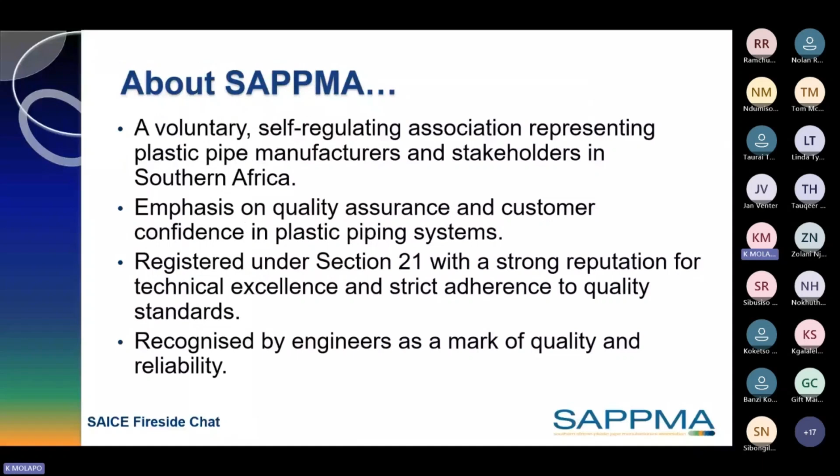You've actually done a great job introducing SAPPMA, and you were very correct in everything you said. We have members that we represent who are manufacturers of plastic pipes, and we also represent all other stakeholders in that plastic pipe value chain, like suppliers of raw materials and other converters.

If you were to go to our website, www.sappma.co.za, we have a technical manual, now on its 5th edition. From that manual you can download much more than what I'm going to show you today. Because we have limited time, we'll just focus on a few things, just to excite you and make you aware of certain differences between traditional materials and plastic pipes or thermoplastics.

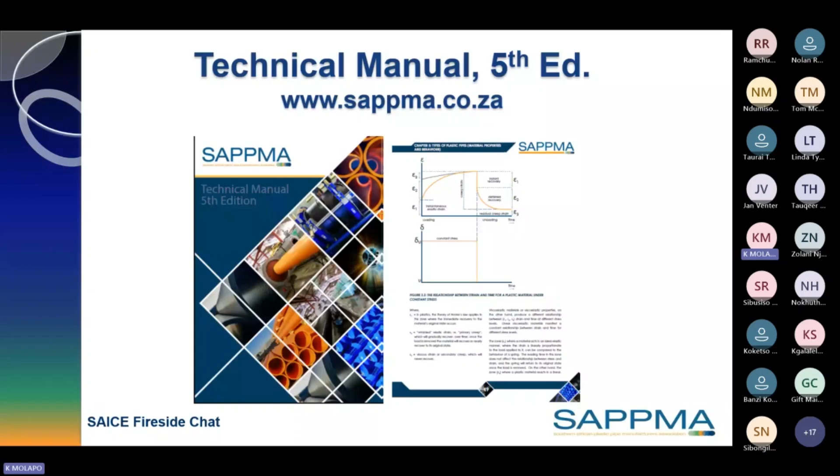So why are we here today? We currently have a serious problem—actually, I would say it's a nationwide problem. I'm sure you are well aware that South Africa is a water scarce country.

Gauteng or Johannesburg, for instance, is sitting on a watershed, and we can't even store water here. The nearest place we can store water is the Vaal. And for us to get that water, it has to be pumped all the way, almost 100 kilometers, and pumped in 2 stages until it gets to reservoirs.

Then it gets distributed to various municipalities. Apparently, in Johannesburg, they lose about 50% of the water that they receive from Rand Water. This is not only Johannesburg. Other municipalities are a little bit lower. But you can imagine if you are collecting that water, or buying that water from Rand Water supplying you at a certain rate, and then you have to sell it.

The profit that you are going to make now, you still have to pay for it. Let's say you bought 100 liters of water, you have to pay for 100 liters of water, even though you are now left with 50 liters to sell. That cannot be sustainable. So we as SAPPMA, we have decided to come forward and offer our help.

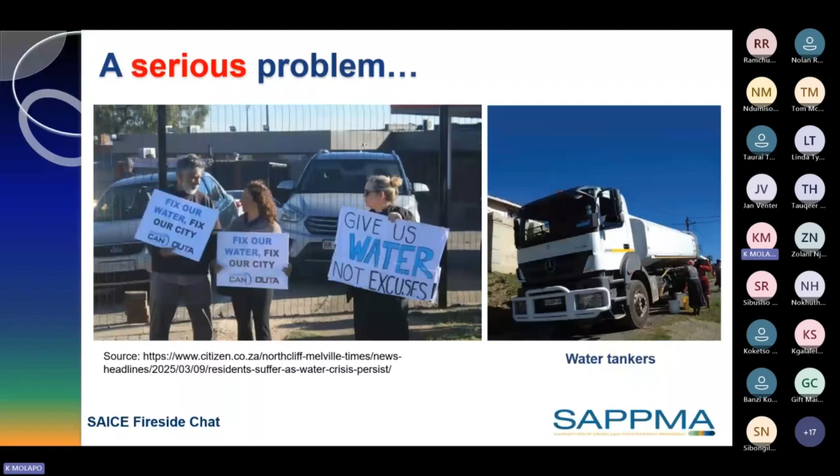So we asked the question, why are we here today? We are here because of the water crisis in Gauteng. Over and above the other things I've told you, up to 50% of water is lost. There's also aging and failing infrastructure.

Our only hope is the Lesotho Highlands Water Project Phase 2, which has also been delayed. Other people are speculating that it will be completed around 2030. Others are saying beyond that. So SAPPMA is here to offer help through training and technical support.

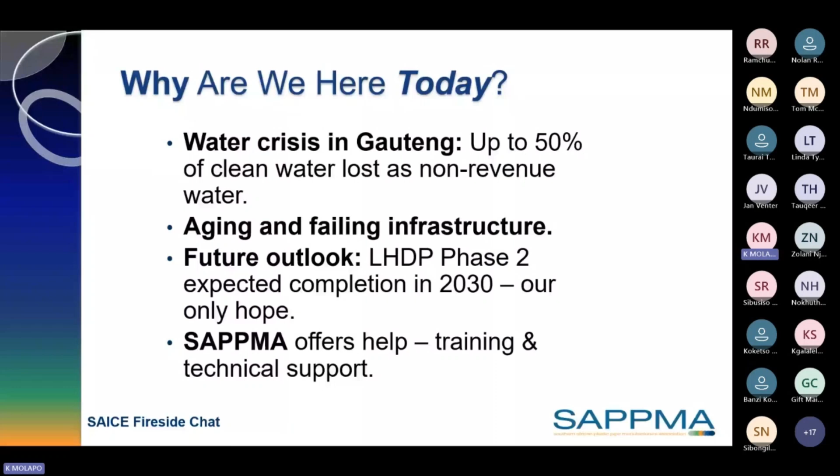So let's go into plastic pipes. There are two main types of plastics: thermoplastics and thermosets. Thermoplastics are plastics that change, they become soft with increasing temperature. As the temperature reduces, they become harder.

So you can either heat them and make them soft and mold them, and you can reverse that molding and reshape it into a different thing. But you cannot do the same with thermosetting plastics. Once you expose them to heat, they harden.

And the reason they harden is because they have cross-linked chains, which also have a 3D molecular structure that disintegrates under heat. So once you do that, the whole thing becomes hard. Whereas with the thermoplastics, they are uncross-linked chains, and we can heat them up to soften them, and also cool them down to make them hard.

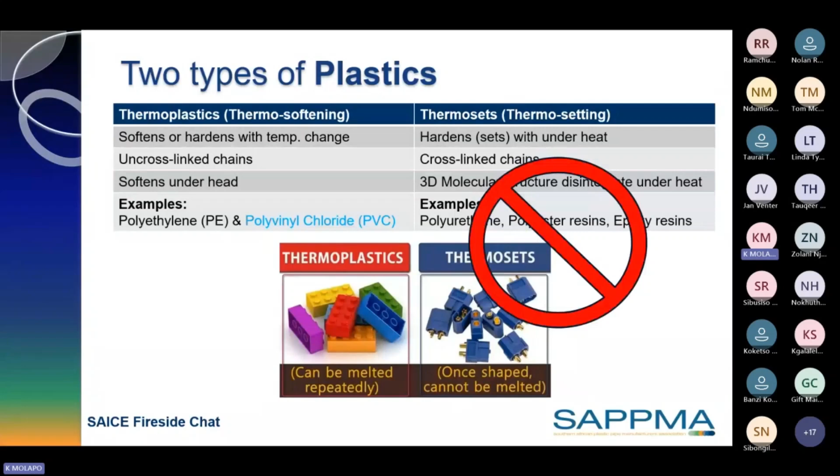Examples of these thermoplastics are polyethylene and PVC. These are the two main materials that we are going to be talking to you about. And we have to stress the point that we want to distinguish them from the normal thermoplastics, in that this type of plastics are called noble plastics.

So whenever I'm using the word noble plastics, you need to know that I'm referring to the thermoplastics that are polyethylene and polyvinyl chloride, and there's also other ones like polypropylene. I want to make this distinction to separate them from commodity plastics that are used for packaging, which are sometimes, or most of the time, responsible for pollution and the microplastics issue that we are always hearing about in the news and on the internet.

So why are they noble plastics? By definition, they are high performance. They're durable, chemically stable polymers. They are also very superior to commodity plastics in that they have long-term reliability and resistance. In fact, they're designed for a lifespan of longer than 50 years.

So they also play a very important role in infrastructure development because of their longevity, efficiency, and sustainability. So you can recycle 100% of these plastics.

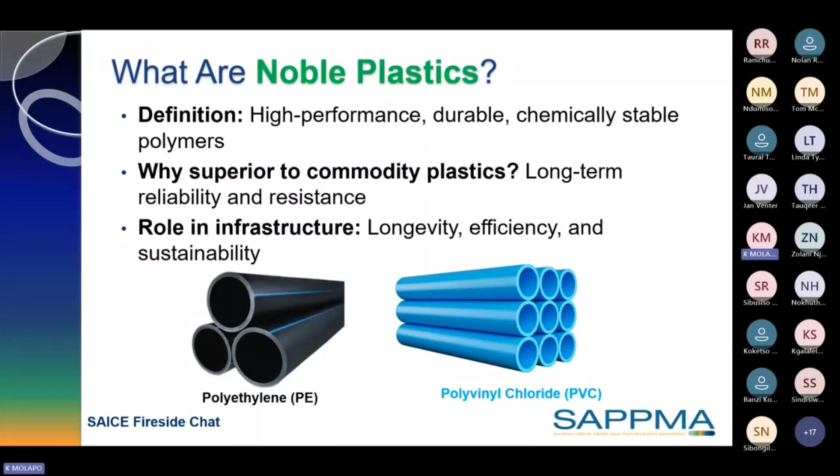So why are we considering the two of them, HDPE and PVC? Both of these materials, although different, are durable and have longevity, meaning lifespans of 50 to about 100 years, so you can use them very well over a long lifespan for infrastructure development. They are also resistant to chemicals and corrosion, which means they are ideal for clean water, sewage and industrial applications, including acid mine drainage.

They also have very smooth surfaces, making them have good hydraulic efficiency. Their strength to weight ratio is high, they are light but have relatively high mechanical strength. In terms of sustainability, they are 100% recyclable, and they play a very important role in the circular economy.

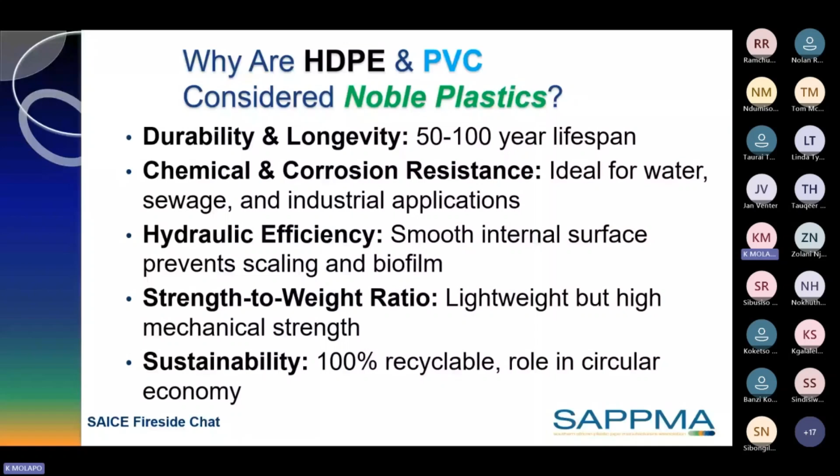So how do they behave? Noble plastics like PE, polyethylene, and PVC are like you and me, in that they have a unique footprint. They also have a working life. We know that we have a certain life expectancy from when we are born. Same way, they also have the same thing. As they grow old, they regress, meaning the strength that you test or get from the lab today, as that pipe is in use, will be slightly lower after a long time.

That's where the creep rupture regression curve comes from. The CRRC that you're seeing there is a creep rupture regression curve, which shows that the strength declines with age.

So they are also temperature sensitive, like a baby, when they are cold, they will sneeze, or even a middle-aged person or an old person. When we are very hot, we want to take off our clothes. Same thing happens, but in a slightly different way, in that when temperature rises, they become soft, and even the strength reduces. But when they become cold, then everything reverses.

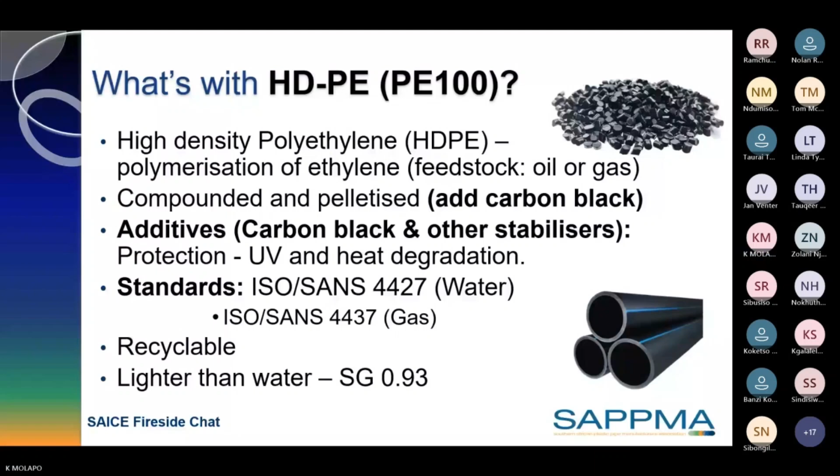PVC - not all pipes or plastics are PVC. So we sometimes see in specifications that they have asked for a perforated PVC. I think they used to make it a long time ago, but now if you specify perforated PVC that is black, usually the person specifying actually meant corrugated HDPE. So because maybe they are not aware of what the word PVC means, they would take anything that is plastic to mean PVC. Maybe the confusion comes from the P in PVC.

PVC stands for polyvinyl chloride, which is also derived from oil, but here you also have salt. So you have salt water that is taken through a reactor or process that will produce chlorine. Then that chlorine is added to ethylene, producing vinyl chloride monomer. So in the same way as the other one was producing a monomer, you have to polymerize it. By polymerizing it - the word poly meaning many - you are now forming it into many chains. That's how it becomes polyvinyl chloride.

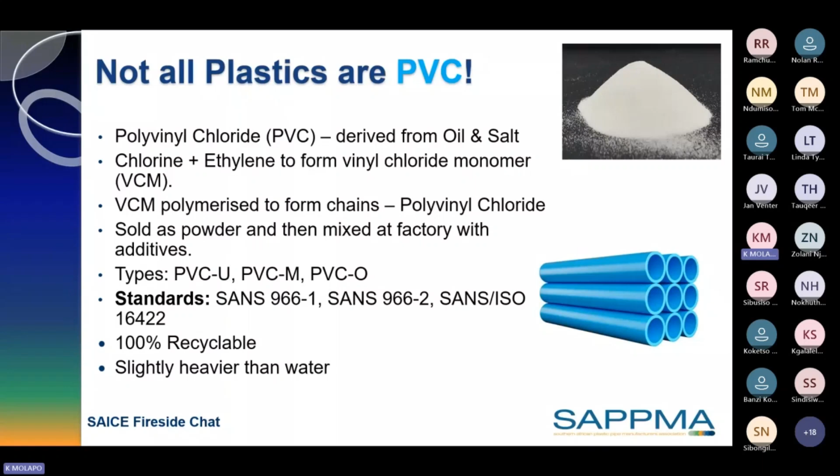So standards that are applicable for PVC, even though I have not listed all of them: for a pressure pipe, you have for PVCU 966 part 1, PVCM is 966 part 2, and then you also have the standard for PVCO. All of them are 100% recyclable, and they are also slightly heavier than water, with very good properties for conveying water.

So we've already said that these materials have a unique fingerprint like human beings. Each one has a rupture regression curve with a particular formula involving logarithms - a log scale in the vertical direction and another log scale in the horizontal direction, showing time. I will show the slides for how those regression curves look next. The minimum required strength, the MRS, is determined at 438,000 hours, which is the equivalent of 50 years.

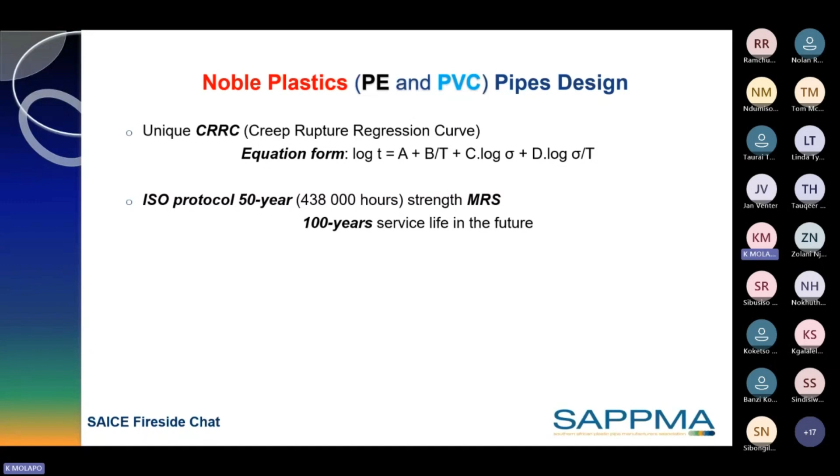In the future, there are people doing studies - in fact maybe there are some materials already which can get to 100 years. You will see how those times show on the regression curve when I show it. So the minimum required strength is at 50 years, and remember the materials are temperature sensitive, so you have to specify the temperature, like normal ambient temperature of 23 degrees.

So how do you classify these materials? You have the allowable stress, which is the MRS divided by the design coefficient. The design coefficient is more like a safety factor - in other disciplines, when designing concrete and other things, you also have safety factors. The design coefficient C depends on the polymer attributes, so different materials or plastic pipes will have different C values, ranging from about 1.4 to about 2.5.

So the lower the number you are dividing the MRS by, the higher allowable design stress you get. These materials are stronger, tougher, and more ductile. But the brittle materials will have a higher C value, meaning the allowable design stress will be lower for more brittle materials.

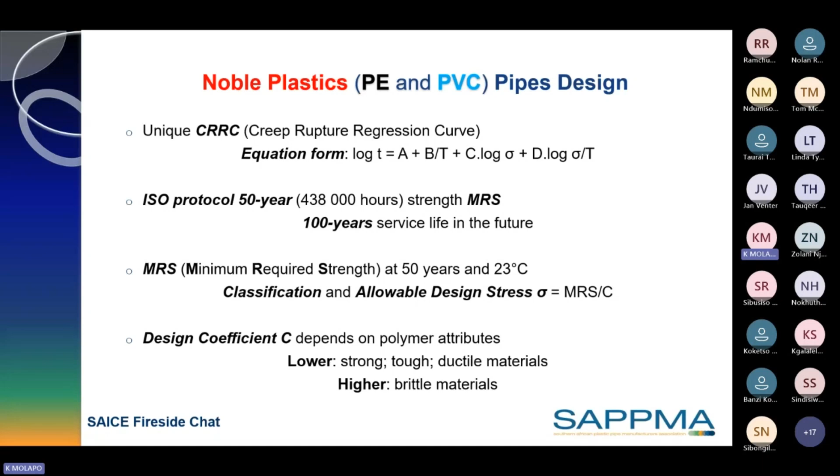So here is an example of a regression curve shown for PE 100. I will show you where the 100 comes from in the next slide. You will see different lines starting from the top going down. If you look at the bottom left corner of your screen, each line corresponds to a different temperature, so as the temperature increases from 20 to 40, 60, and 80, your allowable hoop stress reduces.

At the same time, you will see that the lower you go, where the strength is lower, you also get a more brittle mode, which goes hand in hand with what we just discussed about a higher C value giving you a lower stress.

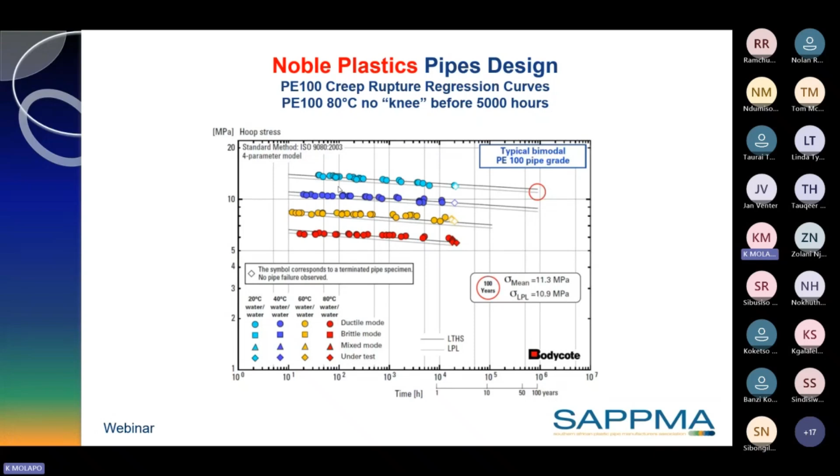So here you have different PVCs. The O has a higher strength, so you have O500. You also have PVCU and M, modified and unplasticized. And then at the bottom you have HDPE.

So to get that 100 of HDPE, which is PE 100, you look at the green vertical line, which is 50 years on the log scale, and the red one is 100 years. You go to where your PE line crosses the green line, and if you draw an arrow, the bottom arrow face pointing to the left gives you a value of 10.

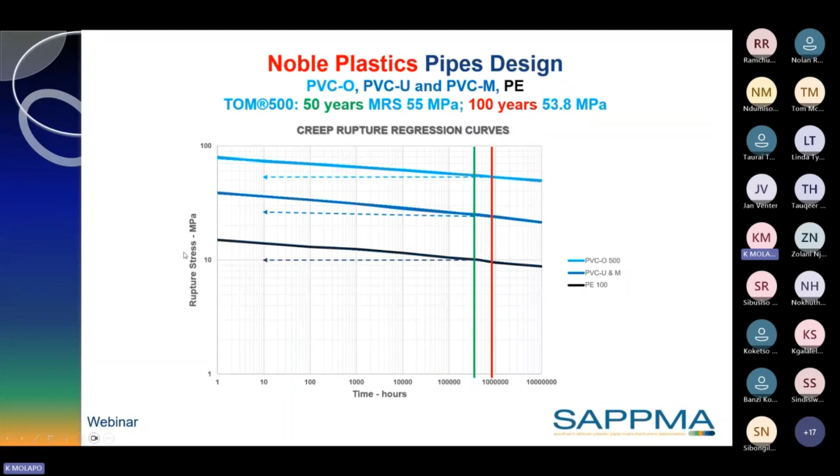So to classify these pipes, you take that value, which is the rupture stress or the MRS, the minimum required strength, and multiply it by 10. I will show in the next slide what I actually mean.

So here is the MRS as you are reading it from the previous graph, which is the value of 10, and then you multiply it by 10 to get 100. So for PE 100, this is how you get to that classification. In the past, we had PE 80 and PE 63, so the MRS for those two were 6.3 and 8 MPa.

So we've already said something about how you obtain your allowable design stress, which will be the MRS divided by the design coefficient. This is more like reducing the strength, so that when you do the design, you are working on a smaller strength.

So for gravity pipes, or even any pipes, you have a formula to work out the ring stiffness, where SR gives you the ring stiffness, E is the elastic modulus, I is the second moment of area, other people call it moment of inertia, and D is the diameter.

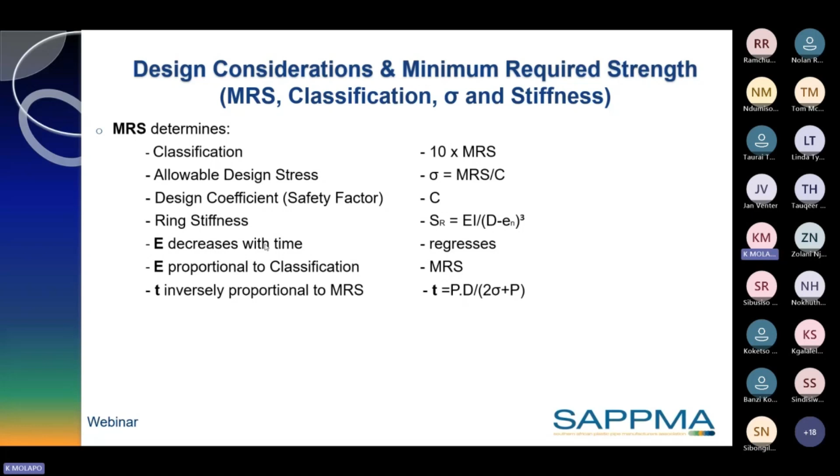The elastic modulus decreases with time. As we said, materials are the same as us human beings, in that with time they regress. Also E is proportional to the classification, so as the MRS decreases, E will also decrease. So T, which is your pipe thickness, is inversely proportional to MRS.

You calculate it using what they call a Barlow equation, where you take a free body of a pipe, assume the wall is a thin section, resolve your forces, and you should be able to work out T, or the thickness, from the resulting equation.

So for PVCO, you have 5 material specifications ranging from 315 to 500. The 500, if you divide it by 10, gives you an MRS of 50. The other one, the lowest, will be 31.5, which as you can see is much higher than what we were seeing for HDPE.

We also have 3 design coefficients corresponding to various material classes, ranging from 1.4, 1.5, and 2. So in working out your allowable design stress for PVCO, you will use the design coefficient C to divide the MRS by.

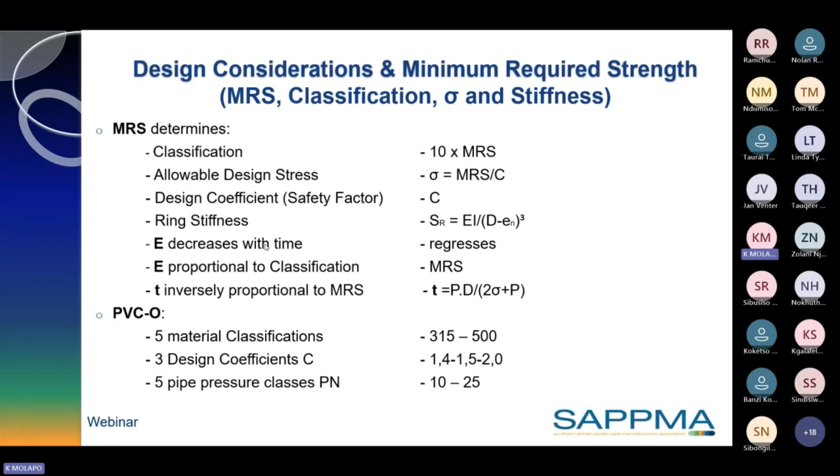So example of polymer classification for both PE100, where the MRS is 10, and for PVCU, where the MRS is 25. In fact, the correct classification of that PVCU should be PVCU 250. But for PVCO, you have 5 material classifications, 3 Cs, and 5 nominal pressures. So you have to be cognizant of the fact that for PVCO, you have those different values of C.

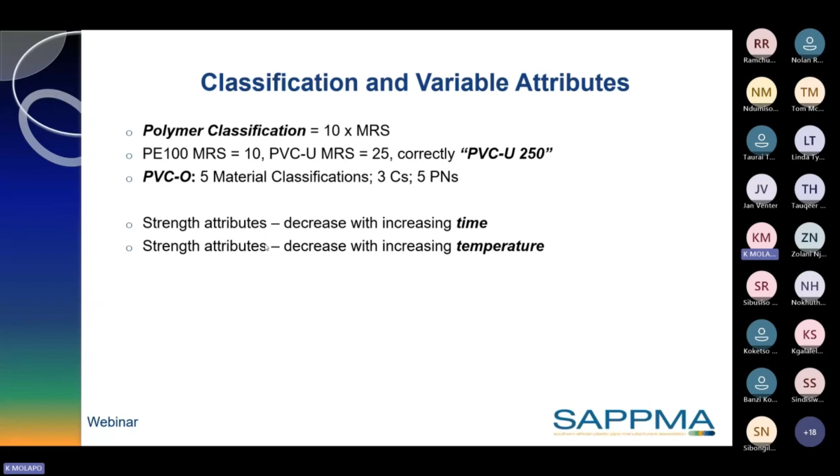So the strength attributes, as we have already shown, decrease with increase in time, or as time progresses, and they also decrease with temperature. So the strength attributes increase with decreased time and decreased temperature. Meaning if you were to reverse the decrease in temperature, the results, even though the time we can't, cooling, let me leave out the time, but cooling your plastic will reverse the attribute.

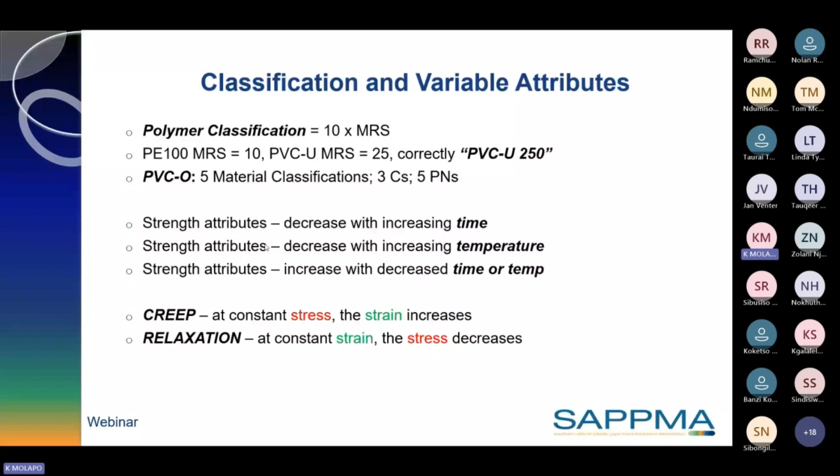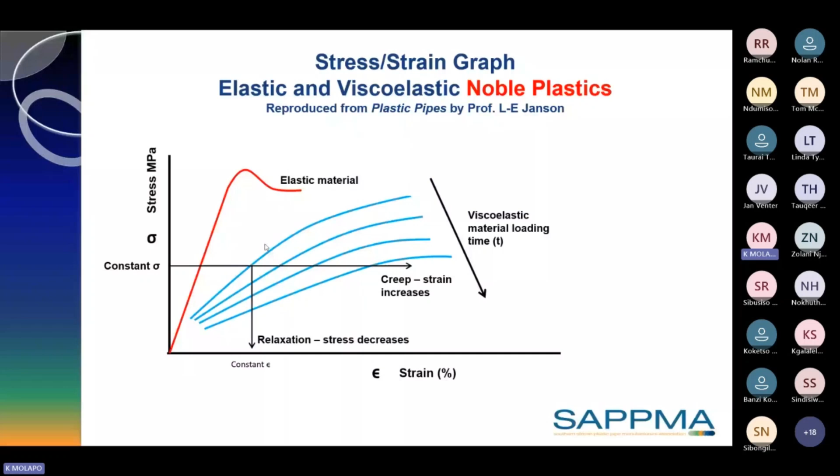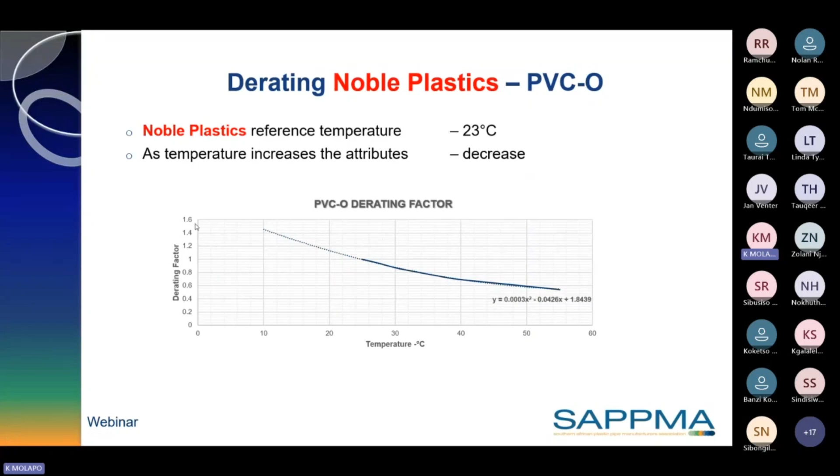So as the temperature goes below, but this was extrapolated, you can see the graph shows the strength or factor going up, meaning the strength will go up. But as you increase the temperature above 23 degrees Celsius, your strength drops, or the derating factor goes down. So this is what you will multiply the strength by.

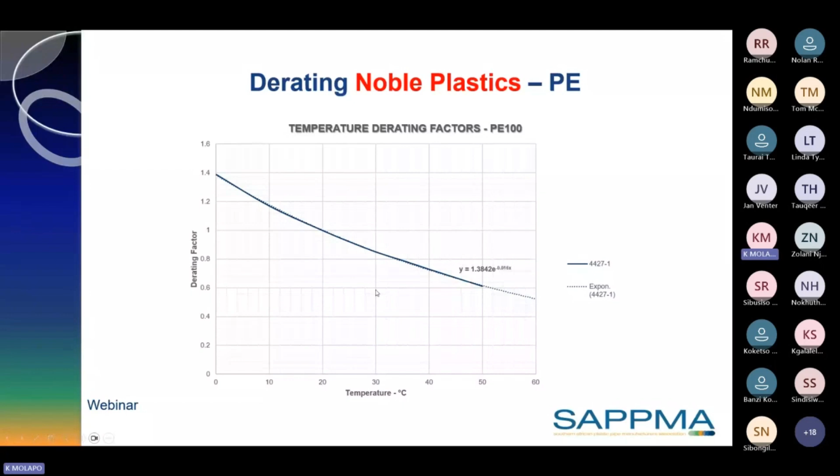So your elastic modulus also for PE, you can imagine if the strength is dropping as the temperature increases, you can also expect the elastic modulus to drop. So if, for instance, you were to install this pipe in Kathu or Sishen, or maybe up north in Namibia, where the temperatures sometimes go above 40 or around 40 degrees, and you want to work out the elongation, at least you know that you have to take into account the factor that your elastic modulus drops as the temperature increases.

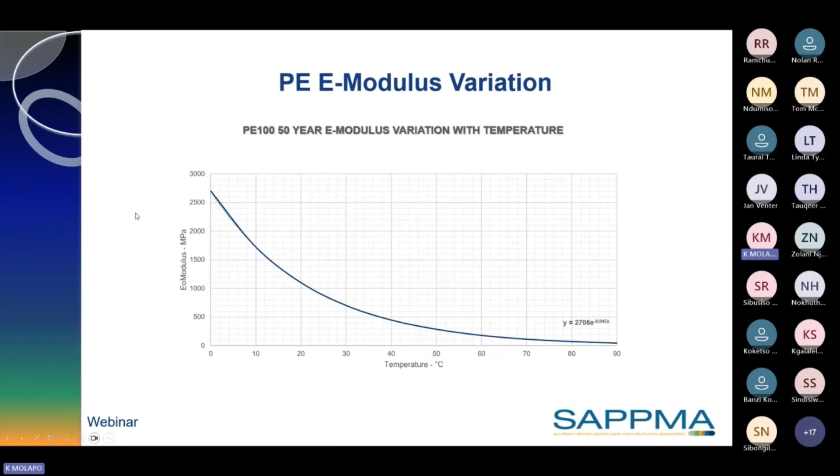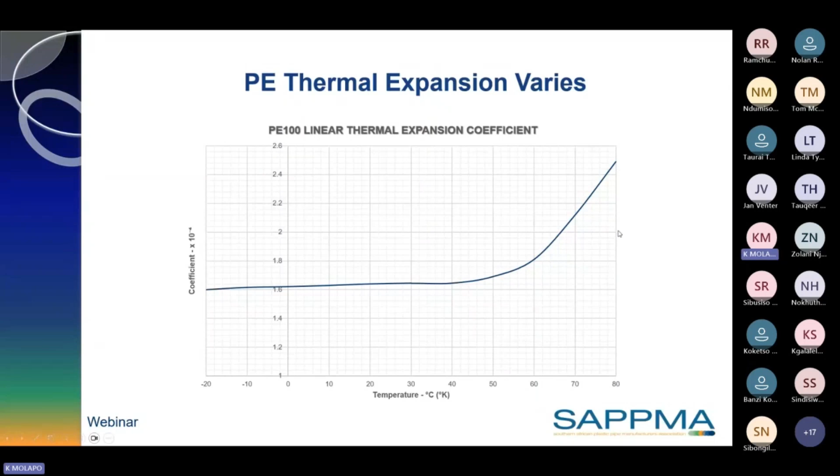So it goes up. Usually your PVC and HDPE or PE100, it's always advisable to use them below 60 degrees Celsius. Anything above this, they are special, or maybe you need to get advice, or there are special pipes like polypropylene, which can actually take boiling water. And there are also variations of polyethylene and variations of PVC that have special additives in them that enable them to go above 60 degrees.

So the other pipes that are there in the market, you have structured wall pipes. These are large diameter pipes that you normally use for no pressure, like where there is no pressure, that is gravity, and even for sewer outfalls.

But the challenge with these pipes, because they are flexible and very large in size, is you have to be sure that compaction around the pipes, even the bedding, is done properly. The same applies to all other pipes, because not compacting properly can cause problems with leakages in the future, or the material on the pipe sagging and then compressing the pipe. You can imagine when a pipe deflects where it's supposed to be jointed, the joint can open up, and then you have issues with leakages. So it's very important to make sure compaction is done properly.

The other material we have is multi-layer PVC for sewer, also called foam core, which is an innovative material that uses recycled material within the wall of the PVC pipe. Then you have corrugated HDPE, some of which have two layers: a smooth layer on the inside, and corrugation on the outside. These pipes are mostly used for ducting. You also get corrugated HDPE for subsoil drainage, where the same corrugated HDPE pipe comes with a sock on top of it.

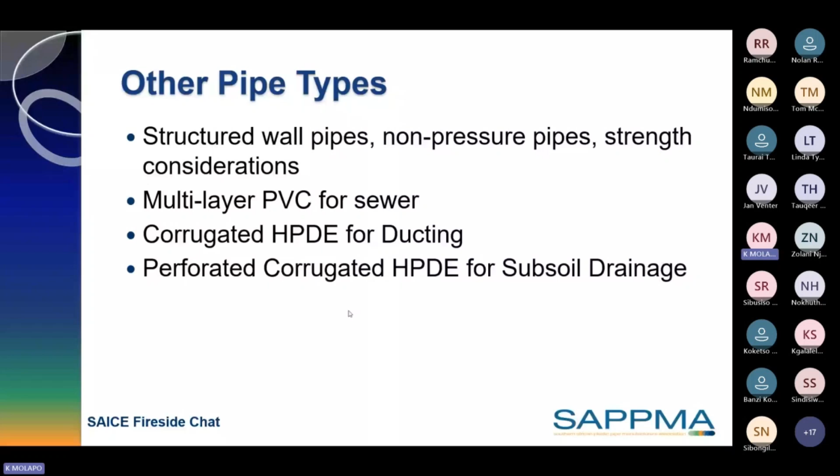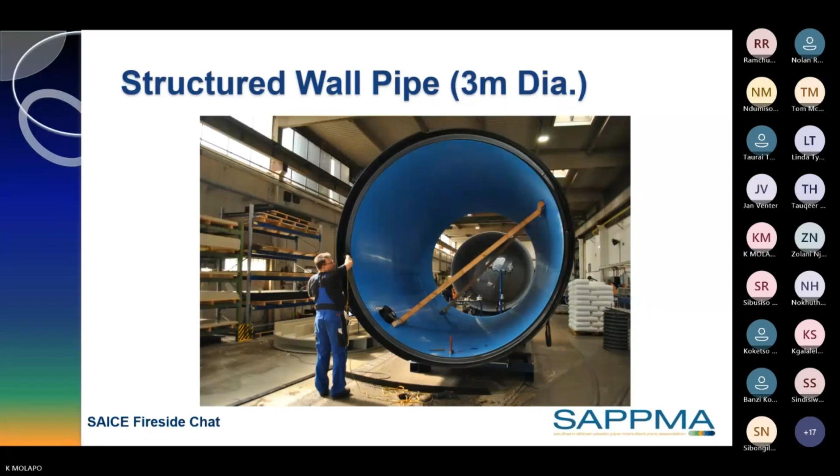But I see them replacing concrete pipes for sewer in the not too distant future. These pipes are also good for areas underlain by dolomite, because you can weld them. So instead of just having a concrete pipe with a seal, with these you can actually weld each pipe together. The other nice thing about them compared to concrete is that they are very light in weight, so they don't require heavy equipment to move around.

For the structured wall pipe, the gravity market is dominated by reinforced concrete pipes. So whenever you talk about structured wall pipes to engineers, they will ask how stable the pipe is and whether it can take loads. You have to be aware that whenever you use a structured wall pipe, you have to build the structure on site. That is, you have a pipe, and when you get to site, you need to make sure the soil surrounding that pipe is properly compacted, and you build it properly to make sure the pipe is supported properly, the same way it's recommended in SANS 1200L, LB or LD for compacting your backfill. That's exactly how you're supposed to do it for SWP.

For those people who are pro reinforced concrete, they like to say that what they are giving you is a conduit and a structure at the same time. Sometimes this justifies that there is no need for proper compaction around the pipe, because the pipe can already take the load on its own, which I really believe is not good reasoning to use, because you get roads that are uneven, because when people are backfilling the soil is not compacted properly, as they believe the pipe can already take the load, so they don't need to build that structure on site. I believe you still have to build the structure, even though the reinforced concrete pipe is strong enough. So yeah, that's my opinion. I suppose next time when we have another debate, we can discuss it further.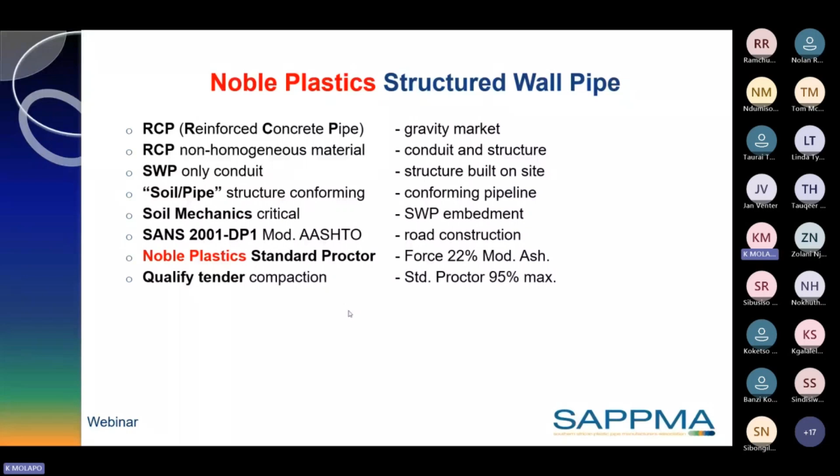So for noble plastics, the standard Proctor force that you use has to be 22% of mod AASHTO. For tenders, usually you have to specify a 95% maximum. Casagrande SC classification specifies 90% mod AASHTO, which is equivalent to a 95 standard.

The pipe stiffness, not ring stiffness, is a measured value, which is also important when you are designing this structured wall pipe. You have to take into account the pipe stiffness as it's going to actually work with the soil structure that you are building on site.

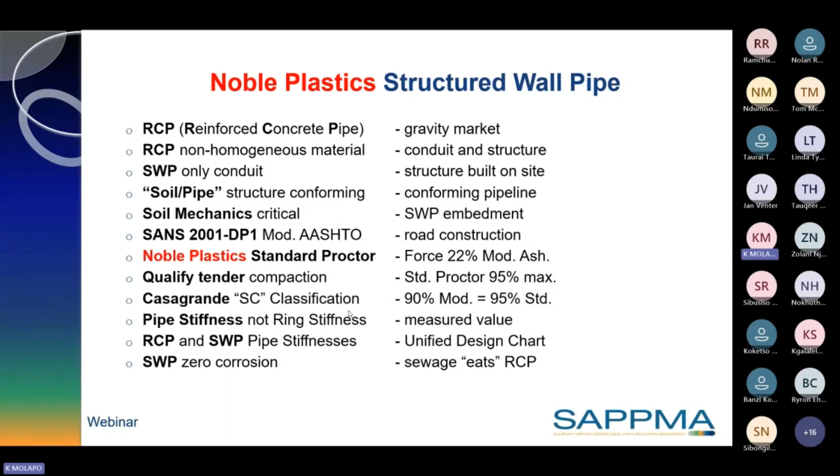Same design charts that you are using for reinforced concrete pipe you use for structured wall pipes, but with the advantage that your flow characteristics are a lot better. So the coefficient of friction is lower, and as other plastic materials, the corrosion is zero. So sewage, actually, eats reinforced concrete pipes, so much that you actually have to line them with the same plastic. So I don't know why we don't build them with plastic from the beginning.

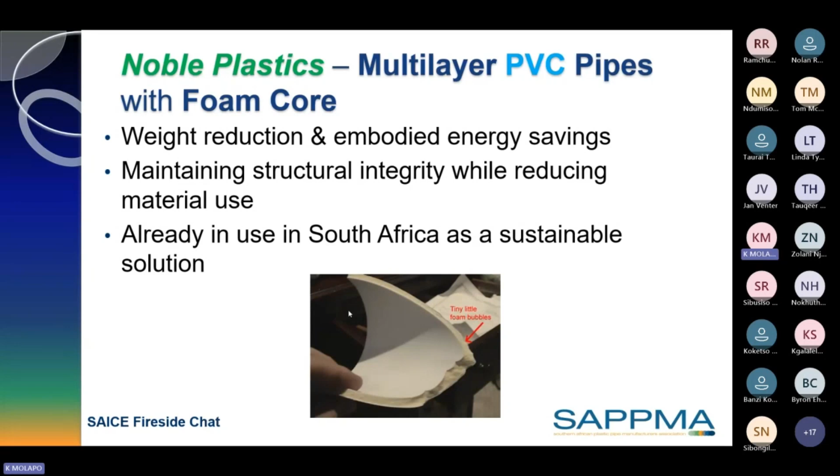So the foam core plastic as one of the innovative materials. I'm just showing that's already being used in South Africa as a sustainable solution for sewage, and it's lightweight. The embodied energy is low, and it's very stiff. You do this while maintaining the structural integrity and reducing material usage.

The other benefits of plastic pipes, also with respect to sustainability, they play an important role, as we have mentioned in the beginning, in the circular economy. They are 100% recyclable, and their hydraulic efficiency is good. And in the future, they can also be used for hydrogen conveyance, which I think will be a big thing. Even for new green energy projects, we can also use these pipes.

We need also to address the misconception about microplastics in pipes. So the reason I was making a distinction of noble plastics in the beginning was to distinguish them completely from the commodity materials or plastics that are used, even though these commodity plastics can be called thermoplastics, but they are not performing at the level of noble plastics.

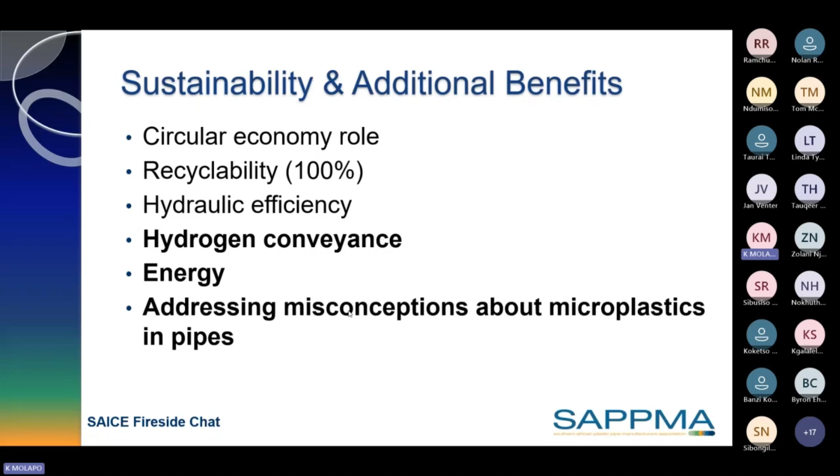So in conclusion, Noble Plastics, PE and PVC are like me and you. They have a unique fingerprint, which means each one of them has its own regression curve. They have a working life. They grow old with time, as you can see on the pictures there.

I wonder whether the term regress is the right one. Maybe we should just say they grow old, because it's as if things go backwards. Temperature sensitive between hot and cold, and they are suited for a particular job. Also, unlike other materials, they have variable attributes varying with time and temperature, and they have superior attributes short term, and they have superior niche uses like slurry, and have less environmental impact, and they are recyclable.

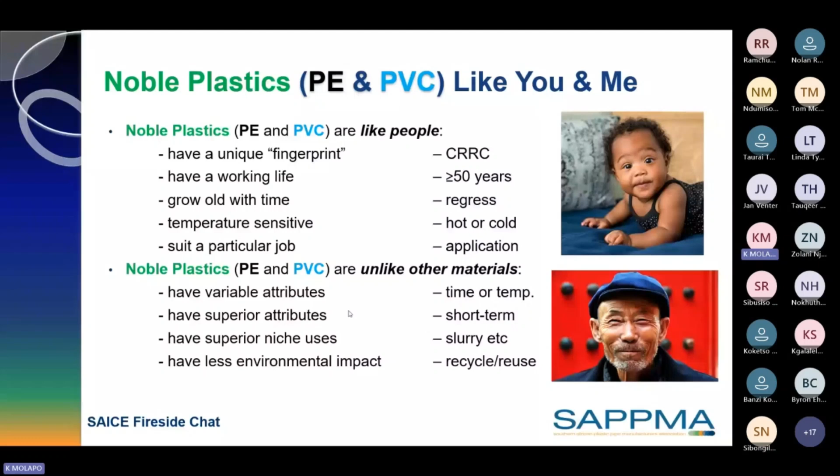I think that brings me to the end of the presentation. Thank you for your attention. And if there are any questions or comments, we are ready to respond to them.

Thank you. No, thank you, Koketso. Thank you very much. And I must say, quite an interesting presentation, and nice technical. One wonders now, did you ever do chemical engineering or study chemistry?

No, actually, it terrifies me. Yeah, I've never studied chemical engineering, but I think over time I've learned the technicalities of chemistry. Only for plastic pipes, no, not for anything beyond that, I wouldn't be able to.

What I'm trying to highlight, and it is quite interesting, and it's a message I like to push and promote at each of my sessions, is that you need to be more than just your core qualification. In this case, for you to work in this industry, you needed to understand plastics, the behavior of plastics, the chemical property of plastics. And as you showed now, the very technical detail of how plastics behave under certain conditions and tests, and the different properties. I mean, that's more the field of almost like a chemical engineer or some kind of plastics engineer. But you had to do that in your field, just to show how diverse civil engineering can be in the different industries. So yeah, it's quite interesting. Well done on that one.